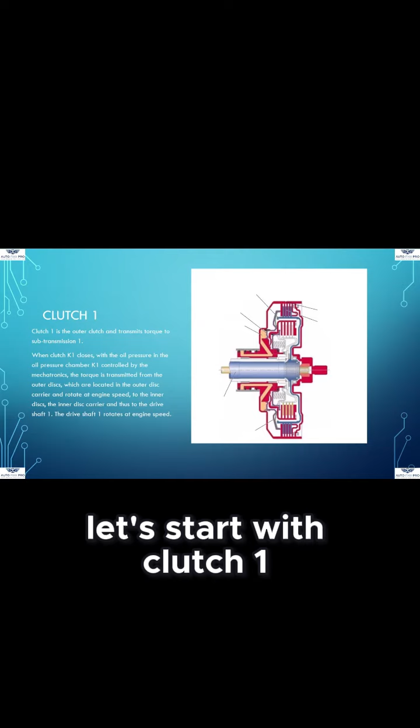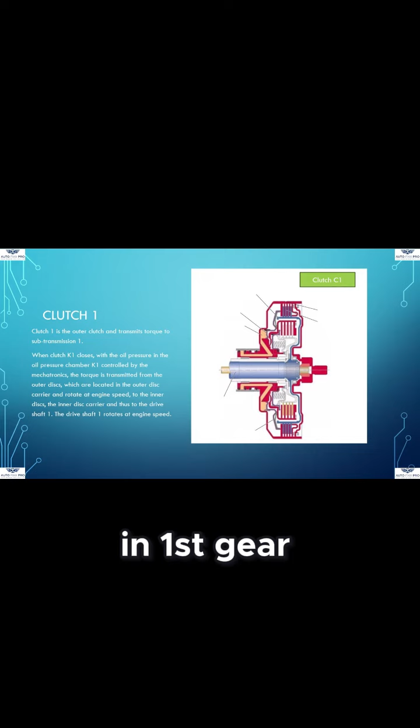Let's start with clutch 1. This is for the odd gears, i.e. first, third, and fifth gear, as well as reverse gear. It is the outer and therefore larger clutch, as the highest torque is transmitted in first gear.

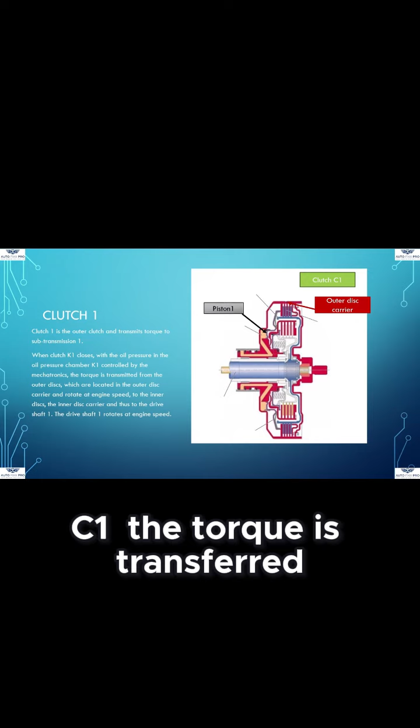As already explained, the torque is transmitted to the outer disc carrier. When clutch C1 closes, with oil pressure being controlled by the mechatronics in the oil pressure chamber C1, the torque is transferred from the outer disc carrier to the inner disc carrier via the outer and inner discs. This is connected to the drive shaft 1 via a gearing, which therefore also rotates at engine speed.

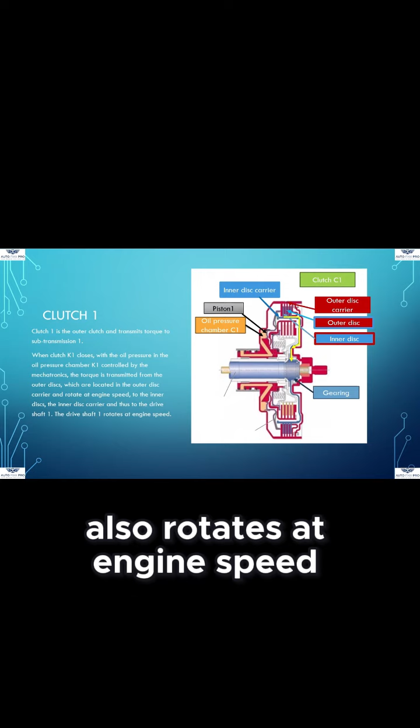In this design, clutch 1 has a disc spring that opens the clutch as soon as there is no longer any oil pressure in the oil pressure chamber 1.

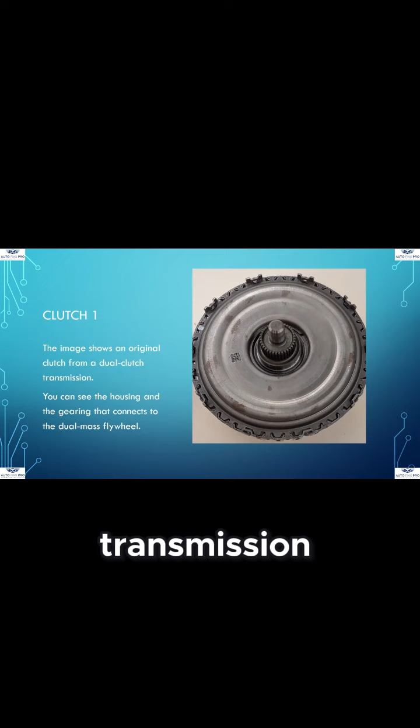Here you can see an original clutch from a dual clutch transmission, the housing with cover and the gearing that connects to the dual mass flywheel.

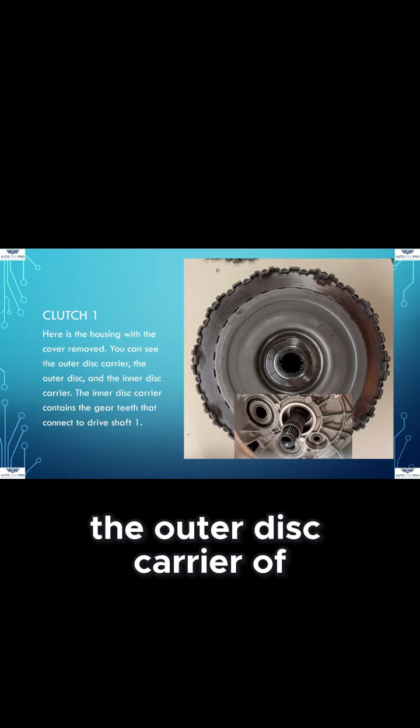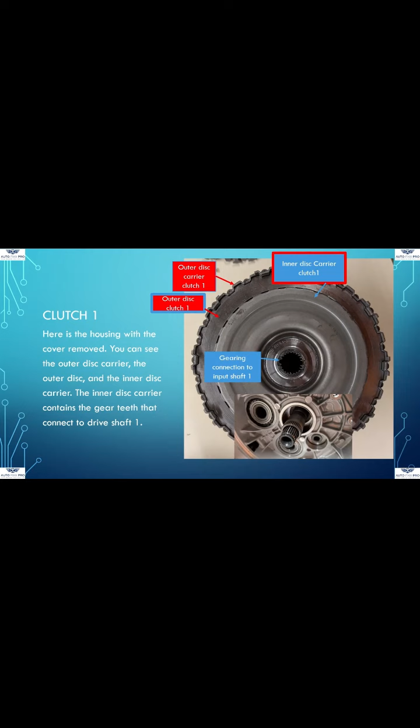There is usually a retaining ring on the cover, which I have already removed. Once the cover has been removed, the outer disc carrier of clutch 1 can be seen. This houses the outer discs of clutch 1. The inner disc carrier of clutch 1 can also be seen, with the teeth that connect it to drive shaft 1. After removing the first outer disc, you can see an inner disc sitting on the inner disc carrier.

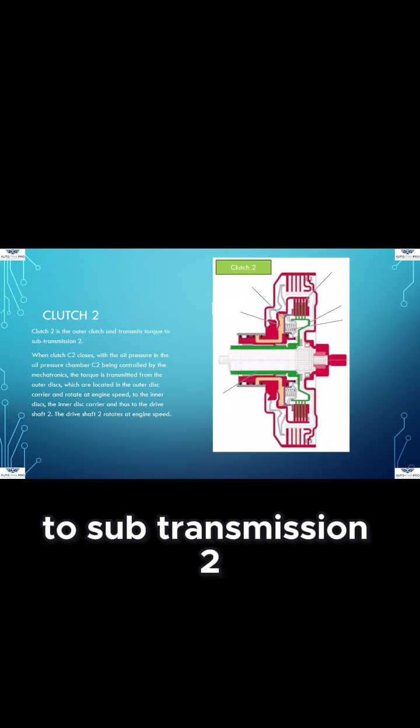The image shows clutch 2. It is responsible for power transmission to subtransmission 2, and thus for the even gears, i.e. second, fourth, and sixth gears.

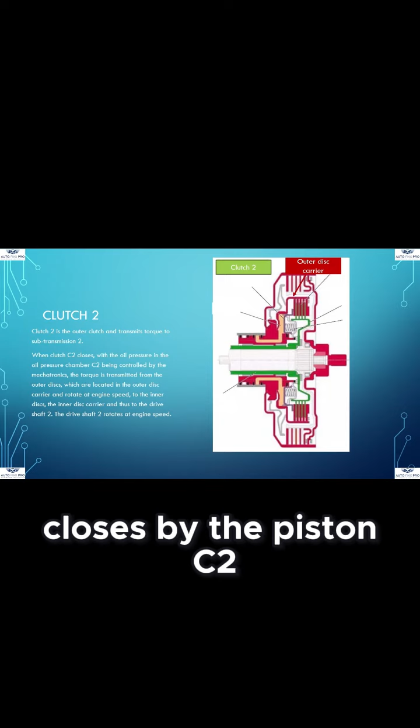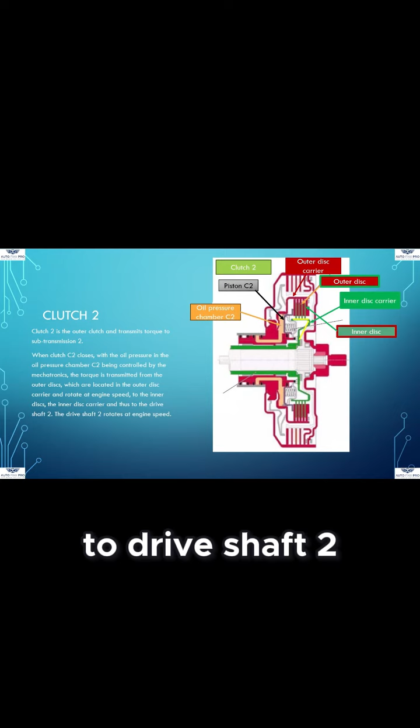Here too, the torque is transmitted to the outer plate carrier of clutch 2. When clutch C2 closes by the piston C2 being actuated by the oil pressure in the oil pressure chamber C2, the power is transferred from the outer disc carrier via the outer and inner discs to the inner disc carrier and via the teeth to drive shaft 2, which is designed as a hollow shaft. Drive shaft 2 rotates at engine speed.

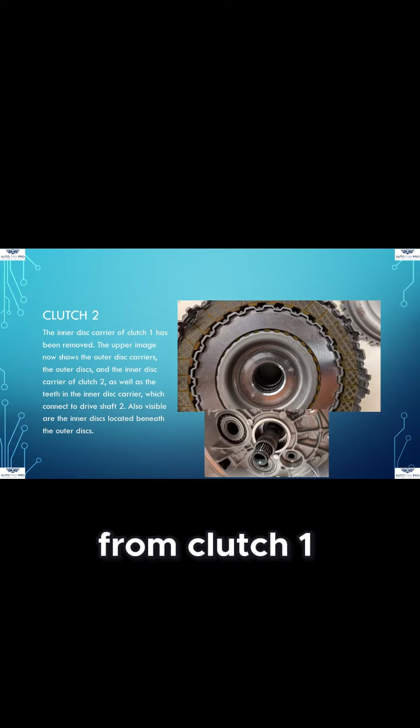A coil spring is used to open clutch 2. After removing the inner disc carrier from clutch 1, the following parts of clutch 2 are visible: the outer disc carrier, the outer discs, slightly concealing the inner discs, and the inner disc carrier. In the center is the gearing that connects to drive shaft 2.